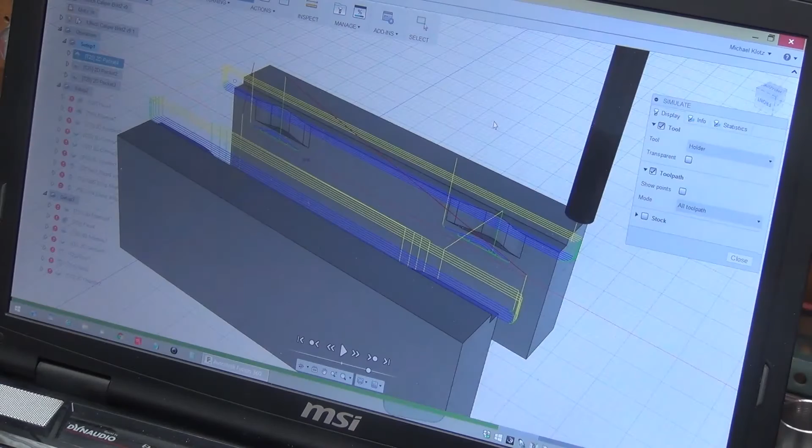Well, I'm getting ready to cut a new set of soft jaws for the second version of these brackets. Okay, and I probably could have just used the other ones, but good excuse to get more familiar with doing this. A couple of the angles changed and stuff like that around the edges, and plus too I put chamfer in on that so that I don't get this pinch mark, and actually it's over here on this side.

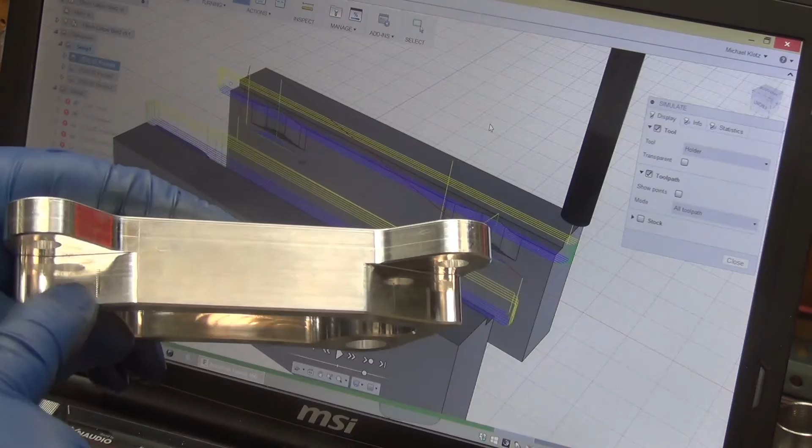They all have chamfers, but so now I even programmed in the groove, okay, the 1/8 inch deep, 1/4 inch wide step in each jaw. And I left myself a note when I do the setup. I go back and whoops, close that. I go back and in the post process I leave myself a note in here. 1.875 spacing is what I have this set up for.

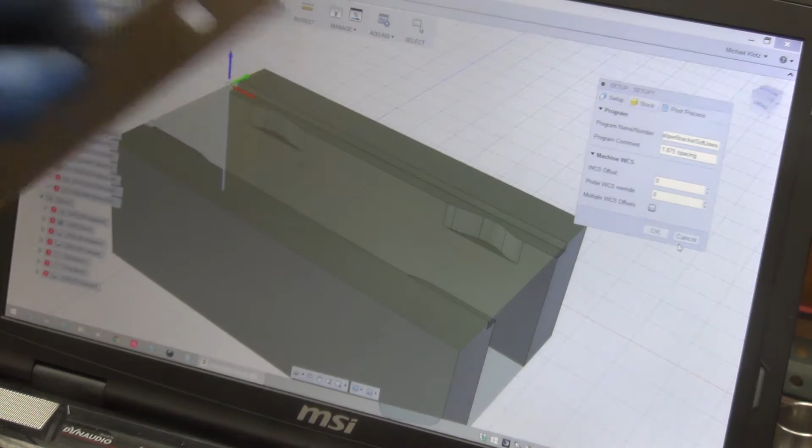Because, and I picked a number with 1/8 of an inch because I knew I could stack parallels because they're 1/8 inch and they're pretty darn accurate, and I only need to be within a few thou basically. So I have a stack of parallels in there, and they're all shorter than those pockets. Okay. So it's going to cut that, and it's going to cut the two pockets for the second op.

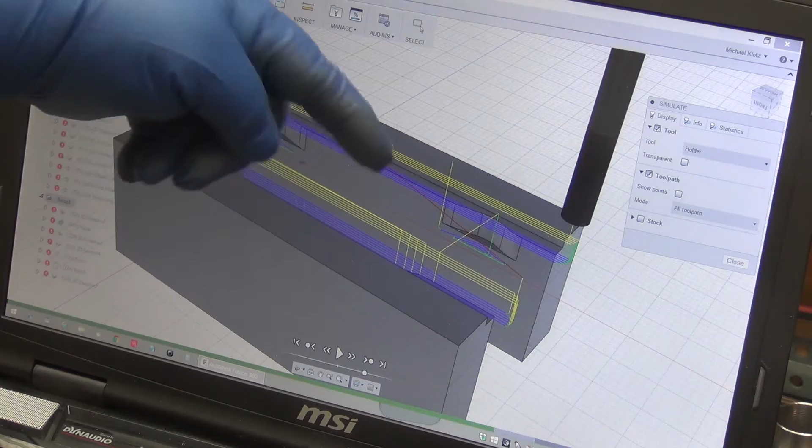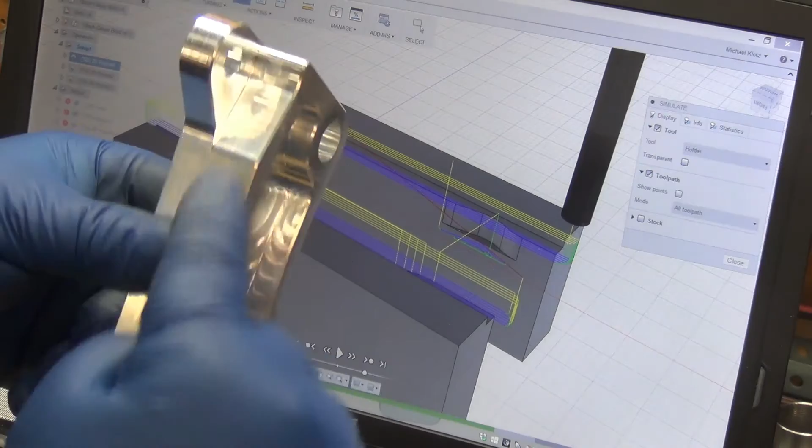So in the first op, I'm going to take a block I already have prepped, okay, and I'll put that in the step. And then when it comes off, it'll come off like this with a big carrier on the bottom. Then when I flip it over, I'll have the points to clamp it in, okay. These shouldn't take too awfully long, but I need to go ahead and get the jaws made, and that's what I've got set up now.

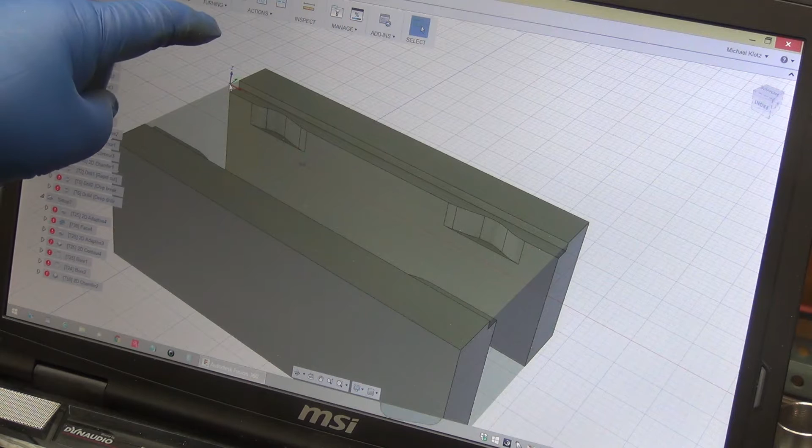And one thing I wanted to point out here, my reference point is right there, which is the front corner of the jaws before it's cut, okay. Everything else is, well, that doesn't show it. Everything else is referenced to the back left of that step.

So I got the jaws, and then I gotta reset my thing, and I know there's much better ways to do it, stuff like that, but this is fast enough and more comfortable for me at this point because I don't have my vise or anything like that in CAD to be able to take a reference point off something else. So I've got the Haimer, makes it pretty easy to change. I'm getting a new pendant here tomorrow. That should make things even faster for setup and that stuff.

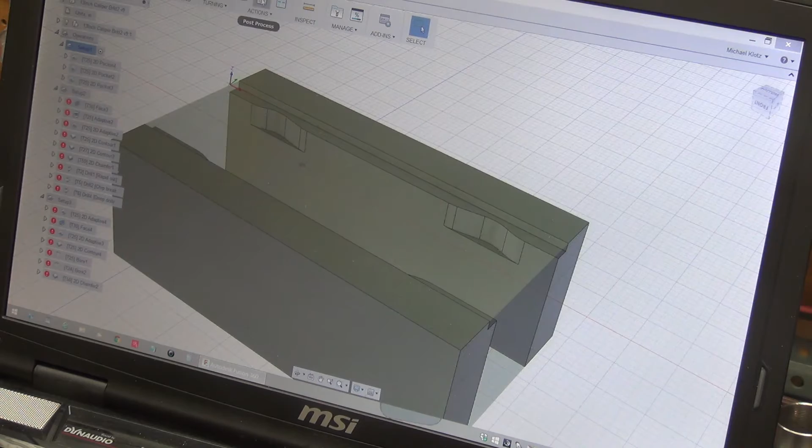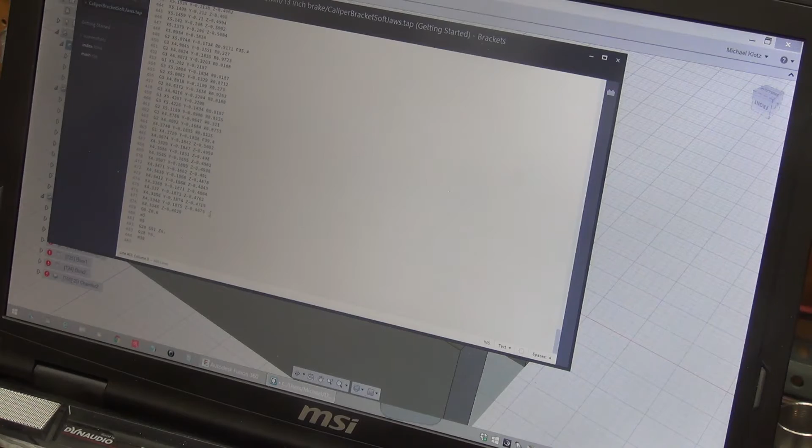So anyway, I think I'm going to go ahead and post-process this again just to make sure that I didn't change something that I forgot about, and this will make it to where I have the most current code over there. And I tend to go down here and, right, wrong, or indifferent, I like to get the spindle stopped. So I put an M5 in there, and then I just want it to come forward toward me so I can take the part out. Okay, so I get rid of the X down here. Then when I close it, it'll save.

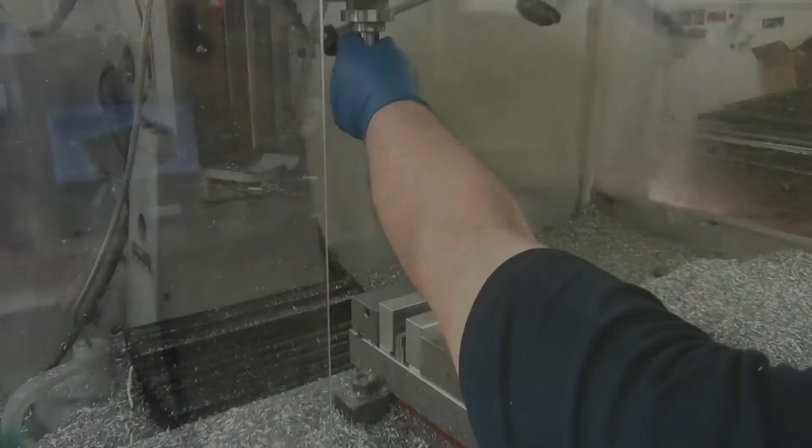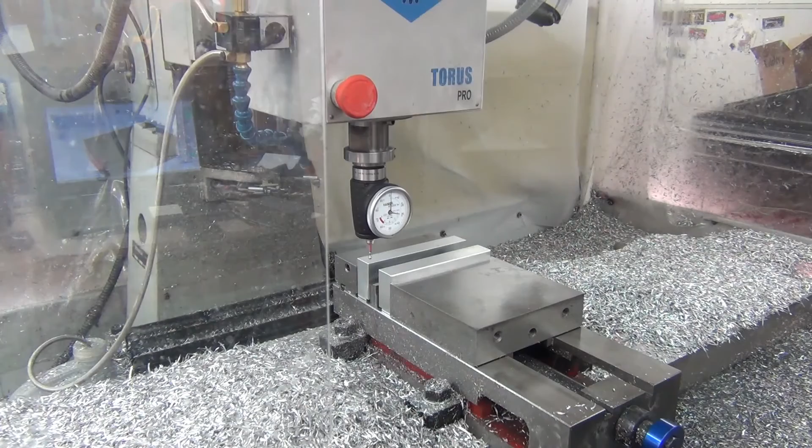I'm not going to load the G-code just yet because it seems that if I load the G-code and then I set my reference point, it keeps wanting to give me a soft limit exceeded. Okay, we'll put the Haimer in and we'll pick our point on the soft jaws. Okay, so I just zeroed out Z.

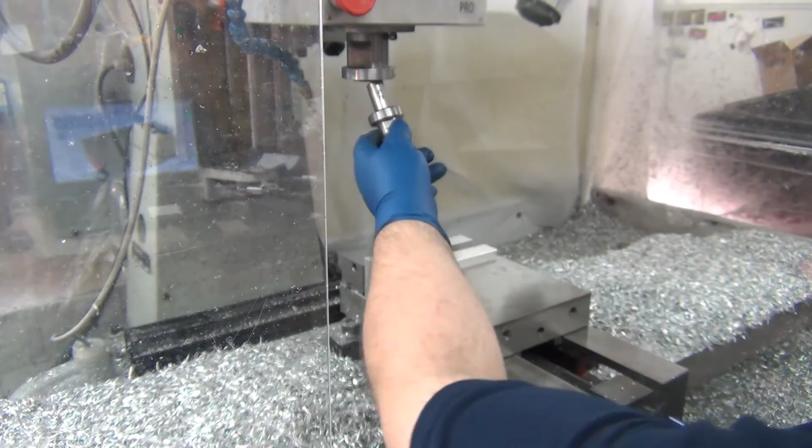Alright, I know it's going to use tool 25 for the whole thing. Oh, ha ha ha. Notice that? I said 1.875. Now it won't affect it, I can open this up, but I need another inch in there. I've got two sets of parallels, but one set hasn't been opened, so I'm having to unwrap the parallels. I don't think that'll matter much. That's 25 thou over.

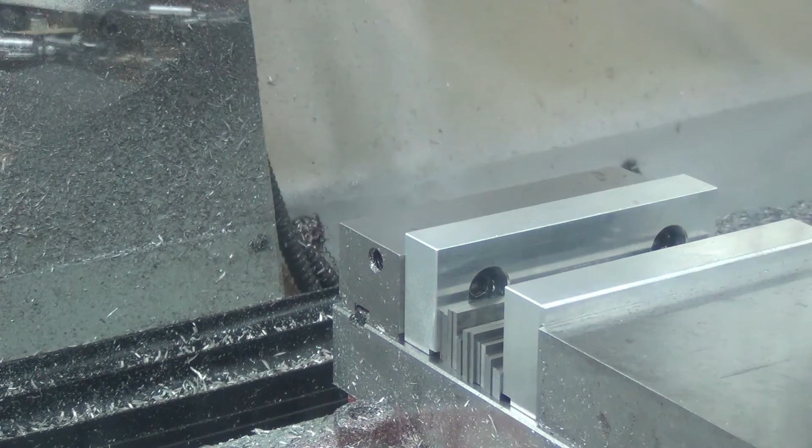Okay, and I'm going to single step into it and sanity check, like John Saunders says. Make sure that it's where I want it. And I just slowed the rapids back down again too, because like when it makes a pass, if it rapids back, I got no time whatsoever to try to stop it. So I slow it down to 60-inch rapids, and it gives me a chance to get over and hit feed hold or something, you know, if I need to.

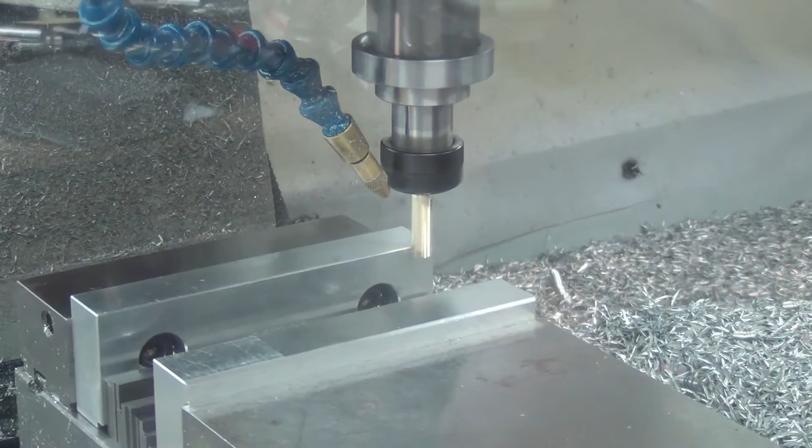I'm going to take the single off because it's down 1/8 of an inch where I want it, so just let it run. Probably should have added a face move in here too. Oh well.